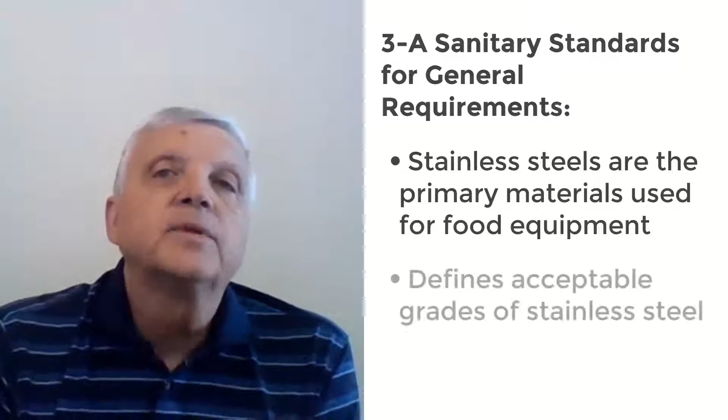Stainless steels are the primary materials used in the fabrication of sanitary equipment because of their corrosion resistance to food products and the cleaning solutions used to ensure the equipment is sanitized prior to use. Acceptable grades of stainless steel are identified in the 3-A requirements.

Also, the fabrication of stainless steel equipment requires welding, which, if performed poorly, can compromise the corrosion resistance and cleanability of sanitary equipment. In order to ensure the highest quality of welding, the D18 Committee of Welding in Sanitary Applications of the American Welding Society has created specifications describing acceptable welding practices for the welding of tube and pipe systems and tanks and other equipment for sanitary service.

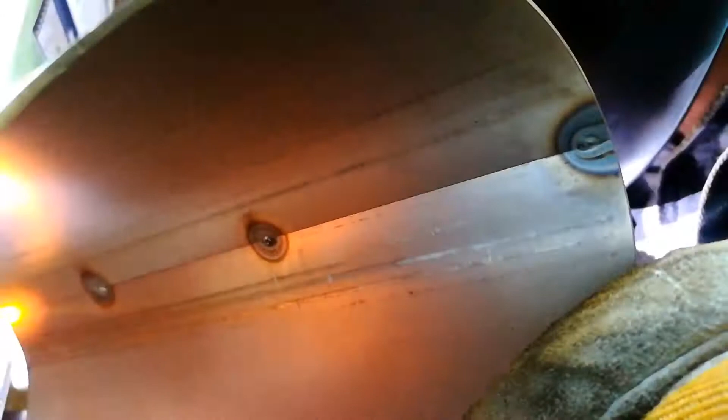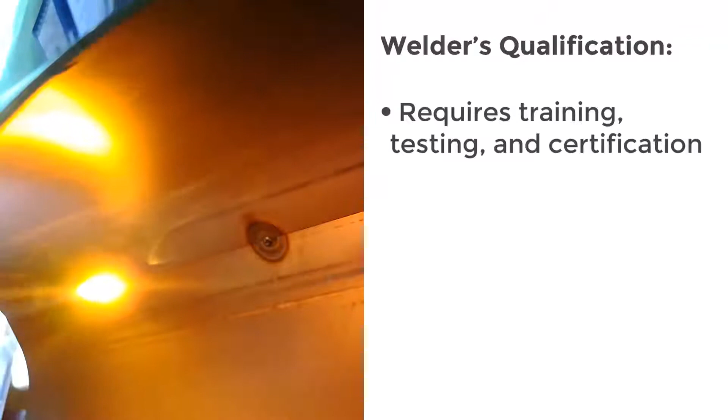To be able to produce a hygienic weld, a welder or welding operator must be qualified by standard test in accordance with AWS B2.1. In the United States, welder or welding operator qualification is achieved primarily by training, testing, and certification by the fabricator. The performance qualification shall be documented in any convenient format, provided all the test results and welding variables are recorded.

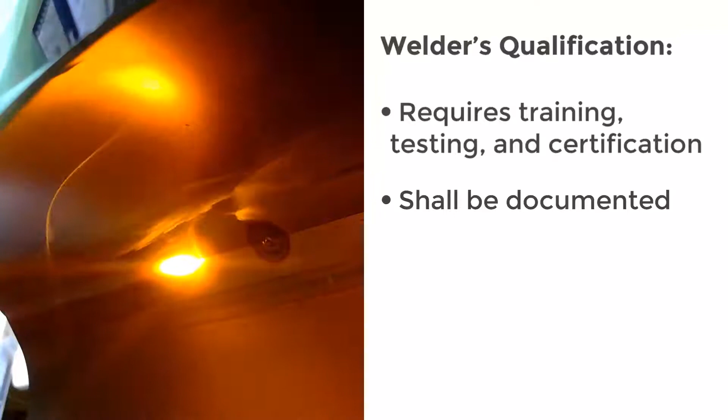A welder or welding operator must requalify when he or she has not welded with a specific process for a period of 6 months or more, or when there is specific reason to question the ability of an individual to produce welds meeting the requirements of AWS D18.

Ensuring the purity of welding gases is paramount to producing stainless steel welds with optimal corrosion resistance by minimizing or eliminating weld discoloration. Excessive weld discoloration reduces resistance to localized corrosion in the heat-affected zone of a stainless steel weld. Oxygen present in air is the contaminating gas which causes weld discoloration. The nitrogen in air is inert and does not produce any discoloration.

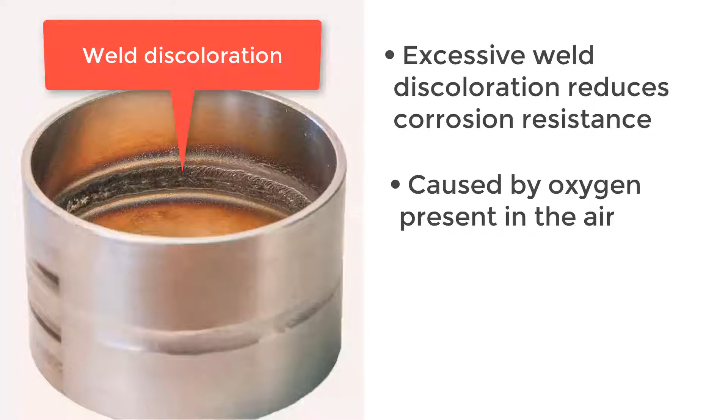During welding, the hot stainless steel surface reacts with oxygen in air, producing a non-protective high-temperature oxide. In order to minimize weld discoloration during TIG and MIG welding, an inert welding gas, typically pure argon, is used to displace air and thus oxygen. When welding a tube or pipe, weld discoloration on the exterior is accessible and easy to remove.

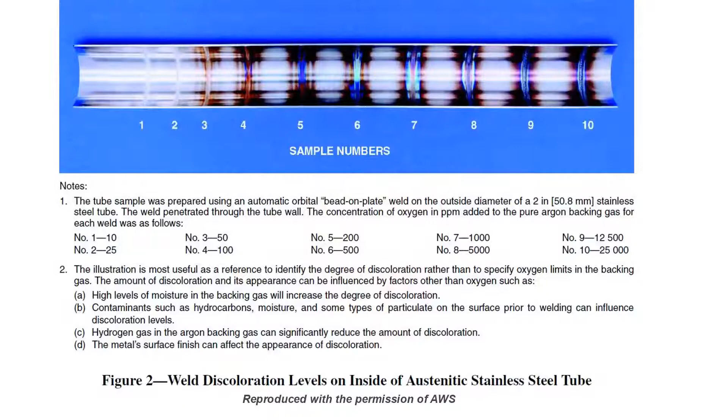However, the interior of the tube is not accessible and large volumes of inert welding gas are required to displace the air. Effectively displacing air can be a challenge, but it is necessary to maintain corrosion resistance in the weld zone. The American Welding Society has produced a visual guide identified as D18.2, which displays a range of weld discoloration that results from various amounts of oxygen contamination.

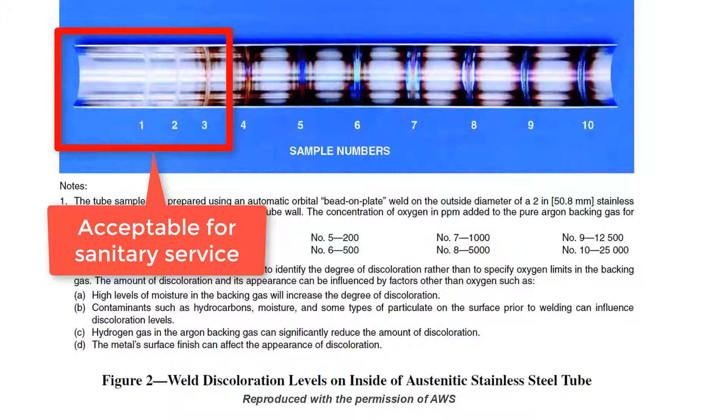For sanitary service, a discoloration level of 3, produced by only 50 ppm oxygen or lower, is considered acceptable. In order to achieve this low level of discoloration, the purity of the gas is essential. Before the weld can be started, a sufficient purge time must elapse, allowing the gas to remove air from the tube. Even moisture present in the gas can contribute to the creation of discoloration, and thus the supply lines providing the inert gas must be leak-free to prevent drawing in air and moisture from the surroundings.

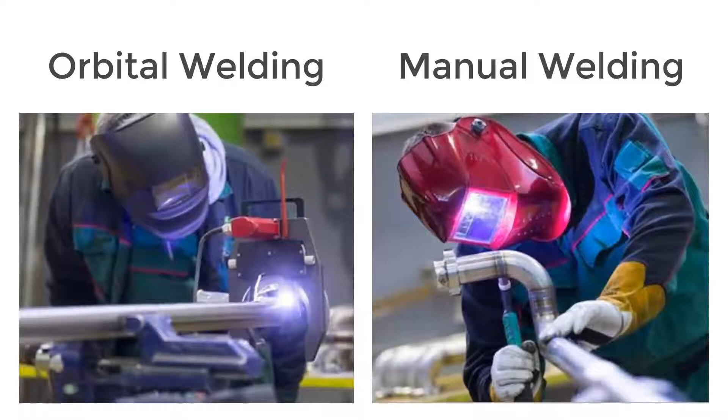Orbital welding is an automated machine welding process in comparison to manual welding. Orbital welding has almost exclusively been carried out by the tungsten inert gas technique, with and without the use of filler wire. AWS D18.1, which is the specification for welding of austenitic stainless steel tube and pipe systems in sanitary application, defines an orbital weld as automatic or mechanized welding of tube or pipe in which a welding arc rotates around a stationary weld joint.

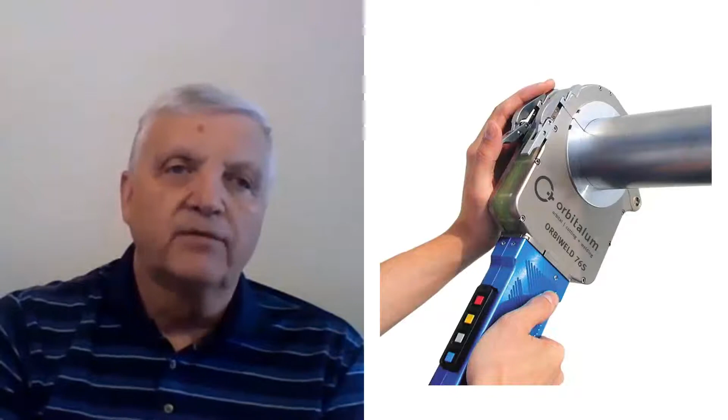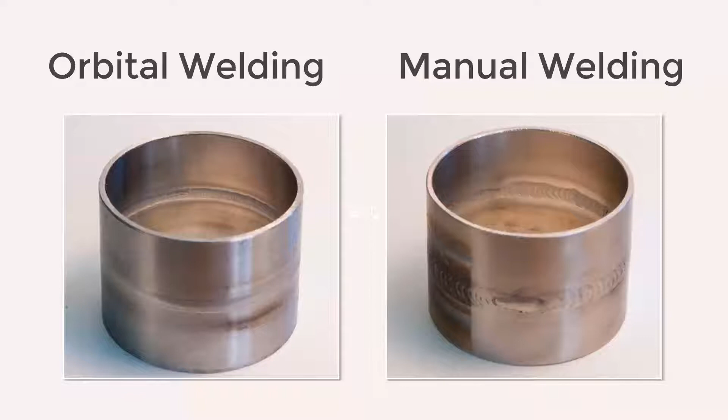In comparison to manual TIG welding of stainless steel tube, orbital welding is achieved with a specialized orbital welding head, which incorporates a clamping device, TIG electrode on an orbital travel device, and a shielding gas chamber. In many cases, a manual weld can look as good as an orbital weld. However, an orbital welding setup can achieve an ideal weld profile consistently with almost complete elimination of weld discoloration.

A consistent and preferred weld bead profile ensures easy cleanability of the tubing, and the very low level of weld discoloration ensures that the heat affected zone on the ID of the tubing will pass the weld discoloration acceptance criteria of AWS D18.1 and thus ensure optimum corrosion resistance is achieved.

Welding is a fabrication process that joins metals by using high heat to melt metals in the area where they will be joined. The melted portions coalesce and cool, resulting in fusion. This fused metal is known as weld metal and can potentially possess different properties than the starting base metal.

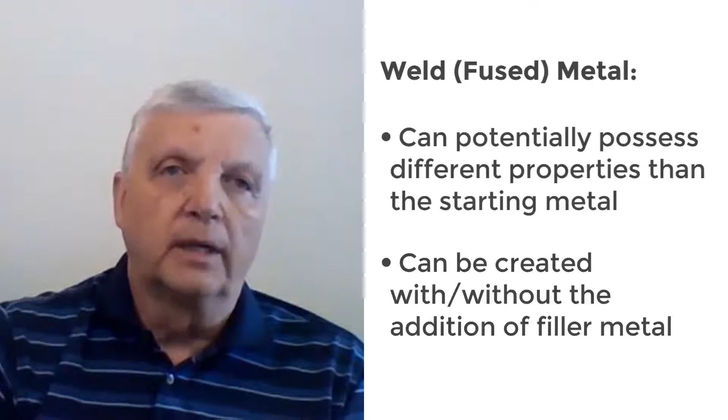The weld metal can be created by the addition of filler metal or without filler metal, which is known as autogenous welding. However, autogenous welding is only possible with thin materials such as sheets or light-walled pipe and tube. Tungsten inert gas, also known as TIG, is the most common welding process that can be performed autogenously.

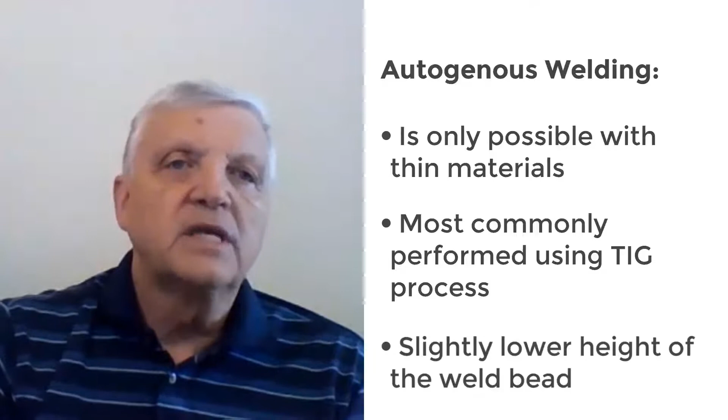There is no significant visual difference between an autogenous weld and a weld using filler metal other than the height of the weld bead of an autogenous weld will typically be lower because of the absence of the additional volume introduced by the filler metal. It must be realized that welding with or without filler metal cannot be used interchangeably in all instances, as it will not always produce weld metal with equivalent corrosion resistance and/or physical properties in comparison to the starting metal.

As stated previously, there is no significant visual difference between the two types of weld, but there is a significant microscopic difference. As-welded, weld metal possesses a cast microstructure in contrast to the wrought microstructure of the starting metal. Also, solidification of the weld metal will result in segregation of alloying elements present in the weld metal. This segregation of alloying elements becomes more pronounced with stainless steels of higher alloying, which can potentially compromise the corrosion resistance of the weld metal, or the fast cooling rate of the weld metal will prevent the formation of an optimal microstructure.

The potential loss of corrosion resistance can be mitigated by welding with an overalloyed filler metal. Thus, weld metal produced with an overalloyed filler metal can possess corrosion resistance equivalent to the starting base metal, while the autogenous weld metal will possess compromised corrosion resistance due to segregation of alloying elements.

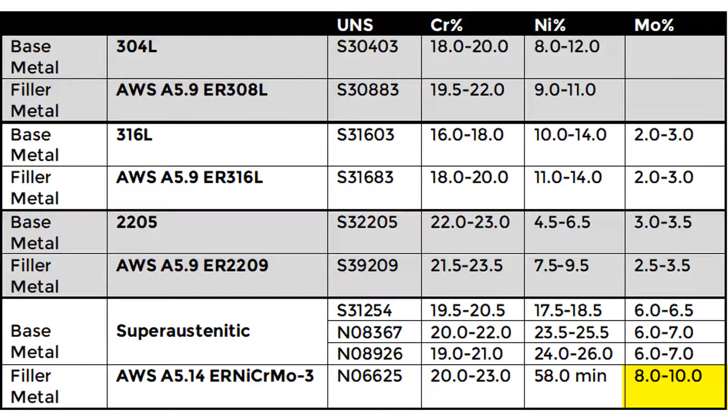Similarly, the filler metal for welding superaustenitic stainless steels is significantly overalloyed with molybdenum. This higher molybdenum content compensates for the significant segregation that occurs with these highly corrosion-resistant stainless steels. Otherwise, the segregation resulting from autogenous welds would significantly reduce the corrosion resistance of the weld metal. Longitudinally welded superaustenitic stainless steel pipe, produced in accordance with ASTM A312, are autogenously welded, but are annealed after welding to homogenize the composition of the weld metal and restore corrosion resistance.

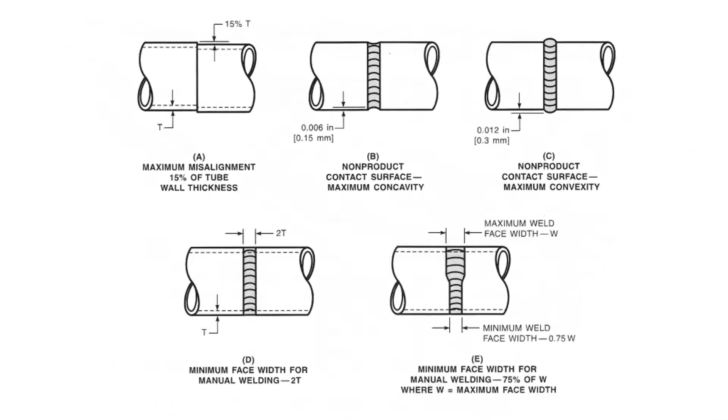A defect-free weld can ensure that there are no spaces where food product can become entrapped and contaminate subsequent food production runs. And an ideal weld bead profile ensures that equipment for sanitary service can be properly cleaned after each production run. Weld defects are quite small and can be obscured by other surface features and thus are difficult to photograph. Thus, in order to describe weld defects or unacceptable features, it is common to do this with illustrations.

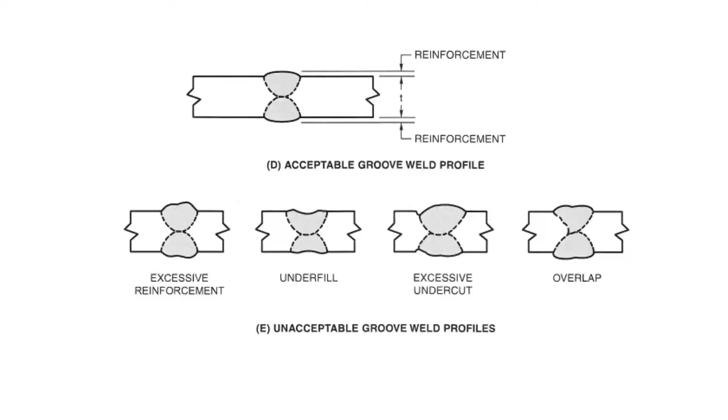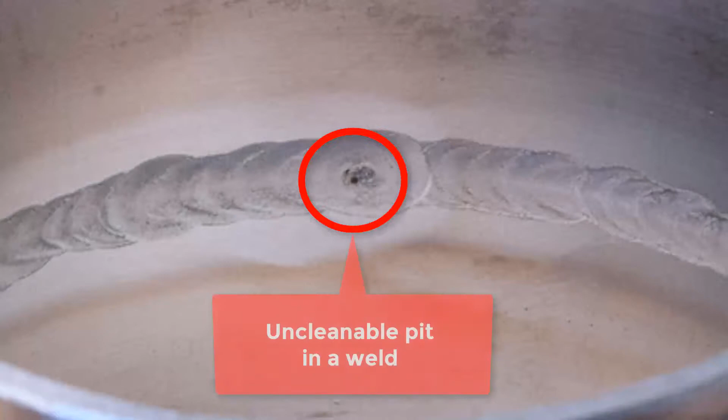With respect to producing welds for sanitary service, AWS D18.1 and D18.3 have identified visual examination criteria for all welds, whether they are for product contact surfaces or non-product contact surfaces. The acceptance criteria includes requirements with respect to penetration, undercut, crevices, pits, cracks, embedded or protruding materials, concavity, and convexity. These criteria are illustrated in a number of figures in the aforementioned standards. In addition, there is a limit on the number and size of slag-like surface impurities also described within the aforementioned standards.